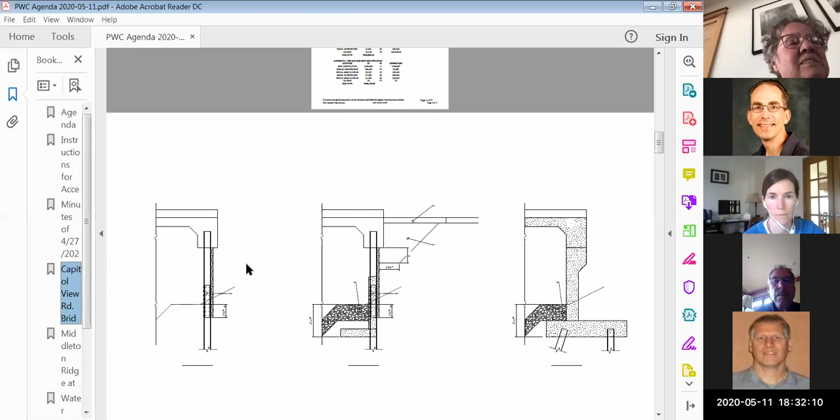Capitol View Road Bridge repairs. We had that on the agenda at earlier meetings, and we sent it back to include some options, and they have options. They've got an option A, B, and C. Maybe Sean can go over that. Right, we could hop down to the attachments, might make it a little bit easier to understand everything. And I'll skip the words for now. So in terms of pictures, let me zoom in a bit. Okay, is that coming through for folks? Yes. With alternate A at least showing up? Yes.

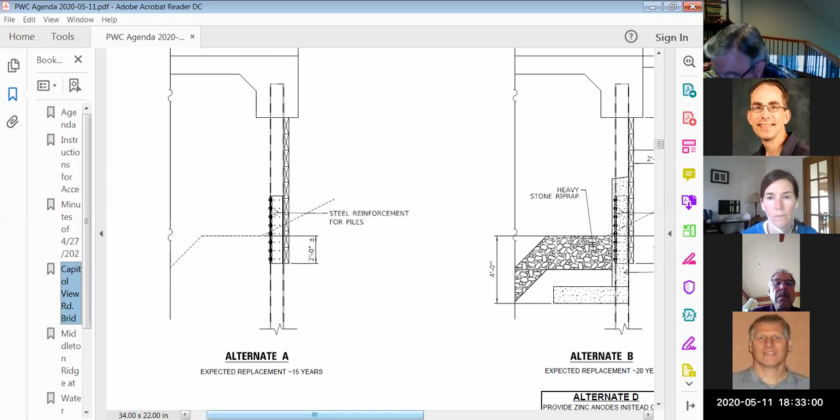So alternate A is by far the easiest of these alternates to keep using the bridge that we've already got. And that is essentially to put some reinforcement onto the parts of the steel piles under the bridge that are badly corroded, some nearly corroded off. But effectively just to marry together what's already there. And they think they can get about 15 years of expected life out of that at a cost of, my recollection is, about $32,000. So that's alternate A in a nutshell.

Alternate B sort of carries that same concept forward, but also adds some riprap into the middle of the flow part of the ditch, and does some replacement of upper abutment boards, and then also has an alternate to encase in concrete or provide some zinc anodes instead of encasement in concrete. And that has a pretty significant upcharge to it, nearly double the price, I would say. The diodes, you mean? Well, either the zinc anodes, sorry, or the concrete encasement.

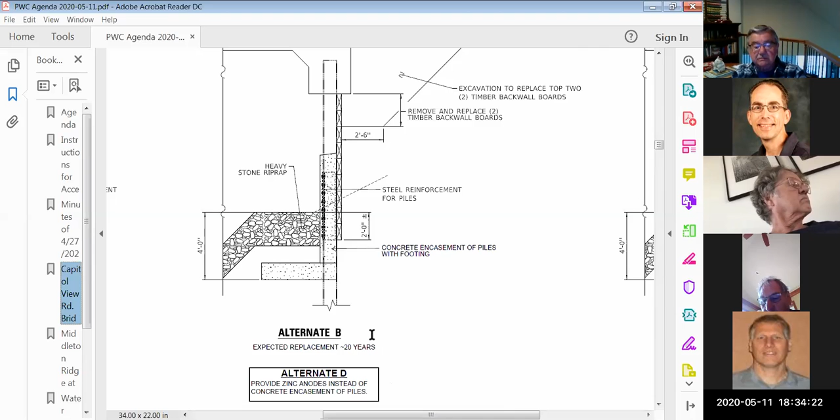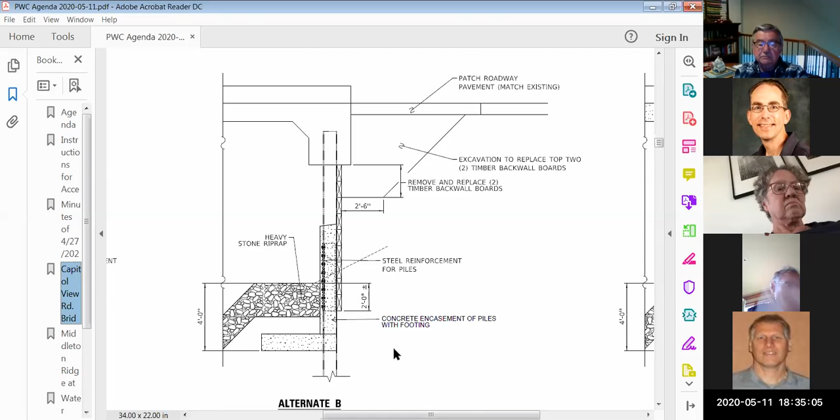Now it adds some riprap, it would add some concrete or anodes, and it would add some extra replacements of timber abutment boards behind the piles. So it is a different scope of work to some degree. It's preventing some erosion and not just dealing with structural improvements. But maybe that's why the lifespan is really a pretty nominal improvement, from 15 years to an estimated 20 years of extra life. So does that make sense? It's about double the price and about an extra 25% of life out of it.

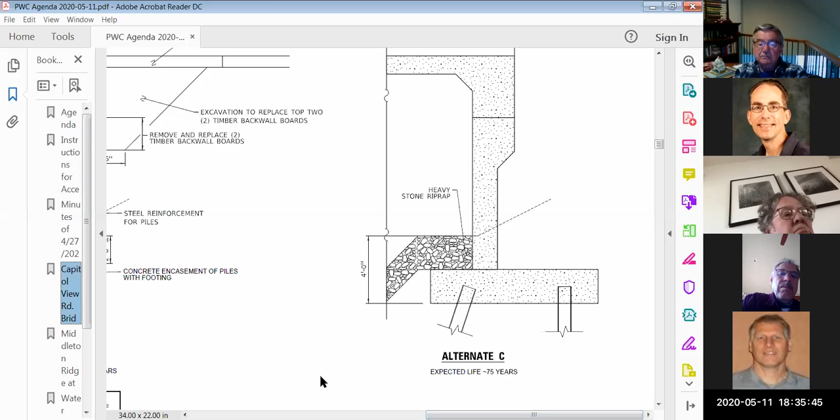And alternate C is really replacement of the bridge with a brand new bridge. So it takes care of the problem and then some, so it has an expected life of about 75 years. But it also by far has the highest cost. Sean, as I recall, they had that cost analysis, and that was still the most expensive per year, right, or not? Did you say per year? Yeah, I thought they had an annualized cost. They had it in a present value of the improvements. Okay, yeah. And they were saying that there's going to be a replacement to this bridge potentially in the future as the area grows.

Yeah, this is Robert. Not just replacement of the bridge, but possibly replacement of the road, needing a wider road, which means I would just state for the record that it's not worth building a brand new bridge here if the conditions around there are going to change in the future. So personally, I'm leaning toward alternate A, which is the least expensive, which gives you the most bang for your buck without putting in a bridge when we don't know what the surrounding areas might need anyway in 10 years. Can I look back at the option A picture? Sure.

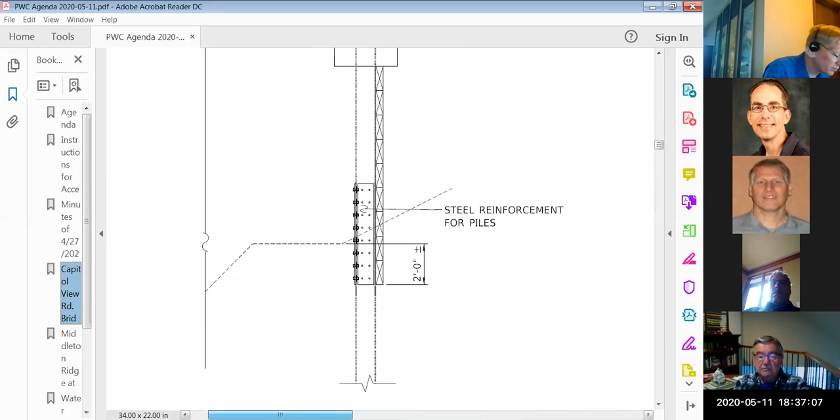So I'm thinking there that the steel below ground is probably okay. Would that be a good assumption? In general, it does seem a little bit elevated from the existing soil elevation, that it's sort of rotted off. So it's really evident where the rust is, but they are going to go down a couple of feet just to make sure. So they're probably going to get into good steel when they go down. And if that steel is good at that point, it's going to be good for a long time.

And I think above grade, we probably have the salt attacking it, and maybe some manure runoff. It's all farmed out there. So I'm trying to understand why the repair is from the ground level up a couple feet, and not all. What's going on above that? Is the corrosion attack not affecting the upper part of that beam?

That's right. Yeah, it's relatively isolated in terms of the length of corrosion. Really bad corrosion near the ground line. Then I support option A. Yeah, Dan, this is Bob Pofall. I stopped out there, and there's a couple feet that, like Sean said, had just kind of gone right above the water level or above the soil level.

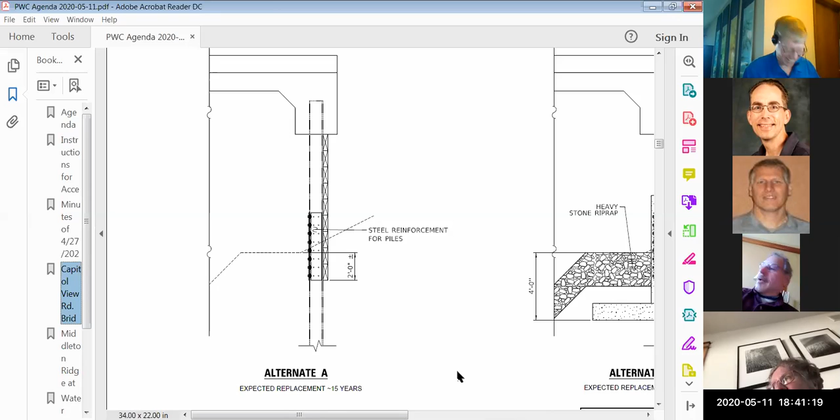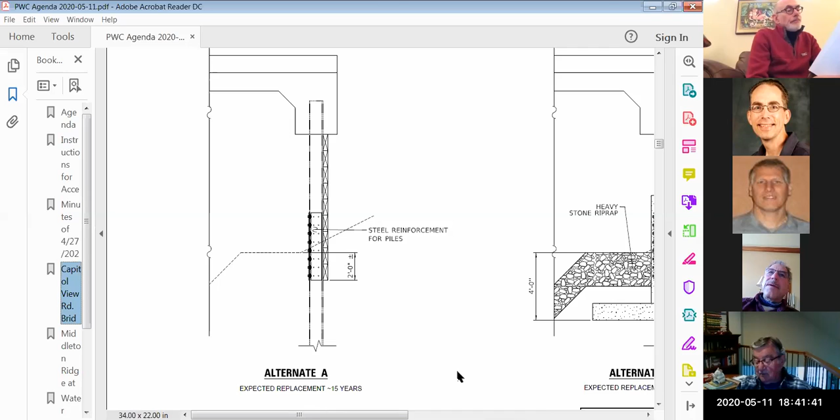I did write Dan in for the second on that. Yeah, Dan got the honors. Excellent. Is there any more discussion? Go ahead, Sean. Just a second, sorry. I just want to confirm, I wrote down Bob Lyons as being the maker of that motion. Yes. Okay, is there any further discussion? All in favor, say aye. Aye. Opposed, same sign. Unanimous.

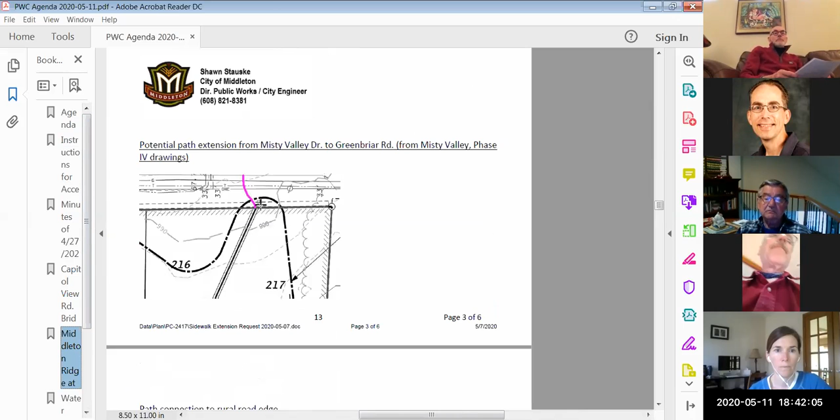Middleton Ridge at Misty Valley, sidewalk extension to Greenbrier Road. Maybe Shawn can go over that one. I didn't get that one looked at. Yeah, and again, I'll scroll down here for a bit and just get to a picture. This is my neighborhood, so I have a question on it. After you explain it, I want to ask a question. Sure, perfect. So north of Misty Valley, where Greenbrier Road runs east-west, which would be at the top part of the diagram that's on the screen, there's basically just grass from about the edge of plat line up to the pavement edge.

And along this common lot line between lots 216 and 217, there's an easement in which we have both a storm sewer pipe and a sidewalk. But the sidewalk terminates at the plat line. It was intended during initial planning of this subdivision that Misty Valley Drive would come through the subdivision and have an intersection with Greenbrier Road, and that it would have a sidewalk, and parts of Greenbrier Road would be reconstructed with profile improvements for sight distance, and the sidewalk might make more sense.

We did stub a sidewalk out, or have the developer stub a sidewalk out for future connection. But a couple of the residents with the homeowners association noted in particular that getting bicycles from Greenbrier Road to the sidewalk and vice versa can be a little bit dicey with grass there, and asked if we would consider extending this dead-end stub of sidewalk up to the pavement edge.

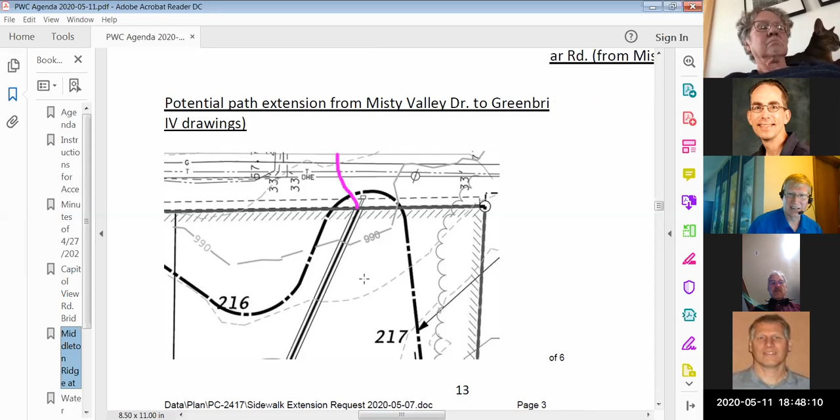And my other question is, if people did get just dumped out into the street there, where are they going? I'm gonna just guess that it's north of that sidewalk. There looks like there's two driveway-like things in the town of Springfield, and if you go to page 5 of 6, you're on page 3 of 6, okay, there's an aerial picture. Do we know where a bicyclist would want to be going? Well, there's a lot of bicyclists that ride down Greenbrier Road. It's not what I would consider very safe. Okay. But they,

Oh, Dan, I think you just cut out. Sorry. Yeah, could you repeat that?

Well, I could say it's similar to both High Road and Pheasant Branch Road. Bicyclists ride on it. There's no right-of-way edging on the side of the road, but they do it a lot, even if it's not safe. Sure. And then my next question was, how else can they get into this little subdivision in the city of Middleton without using the sidewalk stub?

From Greenbrier, there is no other way. You're going over private property. Right. Oh, okay. So this little area is not connectable really to that road. And I also wonder if the immediate neighbors have weighed in on this too. That I don't know. I only heard from two people who I think represented themselves as being homeowner association spokespeople. And at least one of them is interested. The immediate neighbors need to weigh in. I think so, yeah, because this encourages more traffic past their homes. I don't know if that's something we can.

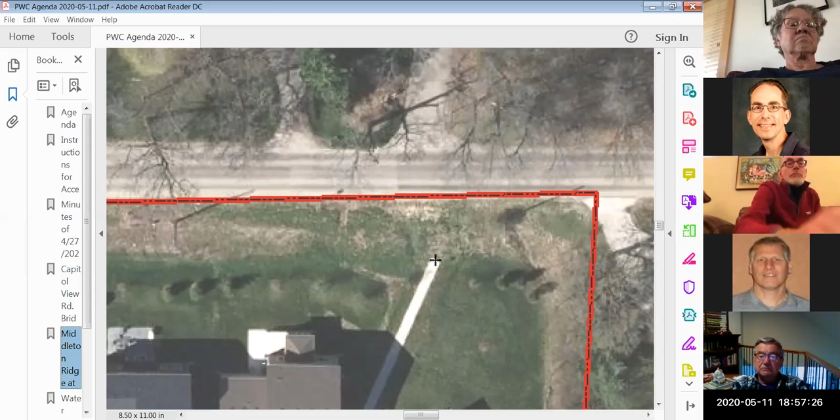Can we visit one more view? Can you bring up an aerial view of just the area to the... Sure. If you hold on the intersection, basically the intersection of High Road. Yeah. Sure. I'll have to launch my Google and then share that, so it might just take me a little bit. I'm looking for the intersection of High Road and Greenbrier. Sure. Well, that'd be down there quite a ways, I think. It's not, 200 yards from it or so. I mean, from a bicycle perspective, it's not that far.

Like Shawn was saying, I can understand the desire to have that shortcut. But I don't know. I still think that we should wait until that road is redeveloped and there can be a proper sidewalk and bicycle lanes or whatever else might be there. Carrie, this is Bob, and I kind of vaguely remember some of that discussion when that was all put in, but there's really no interest in the town doing their half, and without the town doing their half, there's not much purpose for the city to do their half then. Mm-hmm. Part of it, because as you go back farther to the west, that's town also.

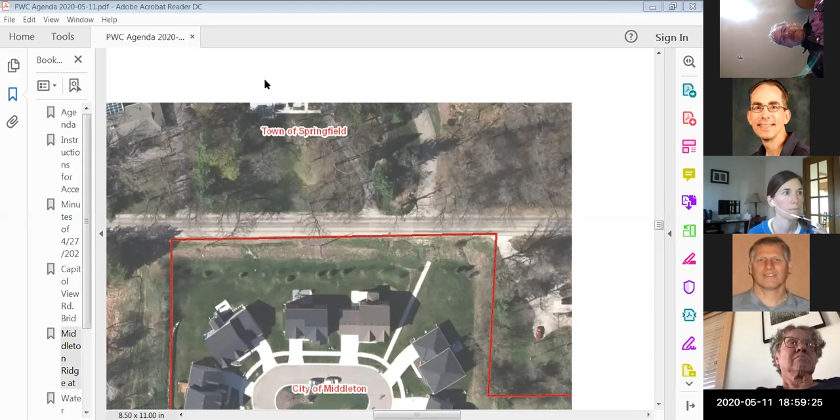Yeah, this road is not designed for the duty cycle it gets as far as traffic. At some point there's going to be a larger road somewhere that's going to have to take this road's load. Well, the Bellefontaine would come through there, isn't that Bellefontaine? No, that was one option until the county bought the Acker farm, but Bellefontaine is platted south of here. Yeah, but it would take the traffic load that's on this road. Right. But I think that is being considered differently now that the county of Dane bought Acker farm. Yeah, the county bought that.

So this kind of shows it, but it's exactly the same situation. You see the sidewalk in the view there. Well, actually, that's just some disturbed earth. This is a pre-development photo, but it is sidewalk today. Yeah. But it's the same thing. It doesn't go to the road. It stops short. Right. It ends right at the plat line. Yep. So this subdivision has two sidewalks that approach Greenbrier Road. That's the point. I just wanted everyone to see that.

Yeah, and I don't know if we have enough of a ditch here that people just shouldn't or wouldn't want to walk through it. I just don't know that offhand. Well, I think there you do have a lot of watershed, that it does have some flows at times. They've even done some culvert improvements along this road here. I can believe it, yeah.

So yeah, my point was, I just wanted everyone to see that there's a second sidewalk that's basically in the same type of situation. It comes up along the west side of High Road and then stops at the plat line base. Not that this is what we're talking about tonight, but is this sidewalk in the city of Middleton, or is this owned by? It's in the city. The city annexed this whole little isolated section of land. Got it. And the city has half of High Road? I'm not sure. Yeah, they do. We do. Okay, yeah.

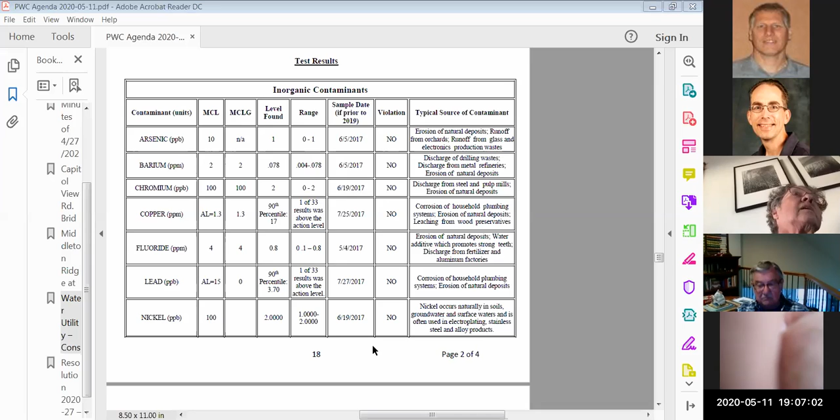Depending on the knowledge of the person, they're going to want to know some of these things. And I'm thinking of this especially right now, we've got the PFAS issue out at Dane County Airport. People here want to know if our water has been tested for that. It is showing up in some wells on the west side of Madison. What was that? The PFAS. PFAS, okay.

But I think we should list all the things that we test for, just so that you get a good feel for how stringent this is. And then I've got a real concern: almost everything that's shown, the last sample date was 2017. That was 3 years ago. That's not real reassuring. So if we were testing for things and they're coming out at very acceptable levels, and we're just not showing that, we need to let the citizens know it's been tested.

Yeah, I don't know if Dave is connected or muted, but I do know that the sampling dates are prescribed for us. So when we've got certain elements at certain cycles, some of our tests are a couple years old, and that has routinely and historically been so. Yeah, I just find it disturbing that, where is lead? I saw lead. Looked like there was one high hit on lead or something, but. Yeah, but the last time it was tested was in 2017. That's a concern to me as a citizen. Now, I know most of that lead is probably coming from the people's own pipes within their houses.